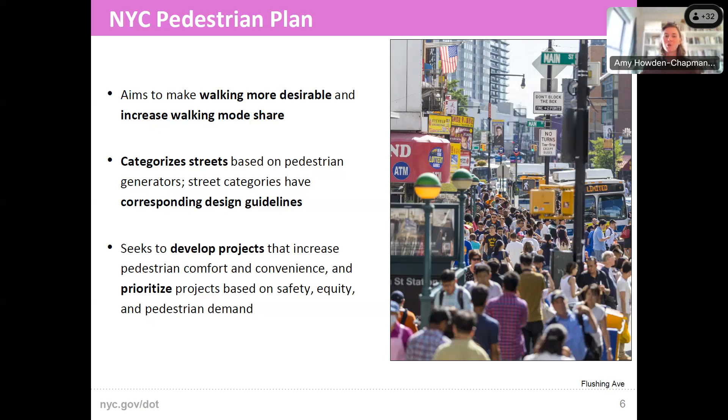We know there's a lot of work to do to improve New York City's pedestrian infrastructure, but we can't do all of that work tomorrow. So where do we start? What is the walking mode share currently in New York City? Where are we at now? And what are some of the barriers to walking that prevent walking from being comfortable and convenient?

Obviously, walking experiences vary greatly across New York City. It's not a monolith, but we see here that in Manhattan, 80 to 90% of commuting is done by walking, and in many parts of Brooklyn and the Bronx that's also really high, 70 to 80%. However, I'm always struck by how even in parts of the city where we know folks are more dependent on vehicles because of land use typology or less access to mass transit, there's still a relatively high number of walking trips.

We see here that in outer Queens, around a quarter of trips are still walking trips, but as we get to middle Queens, it very quickly jumps up to over a third of trips being primarily walking trips.

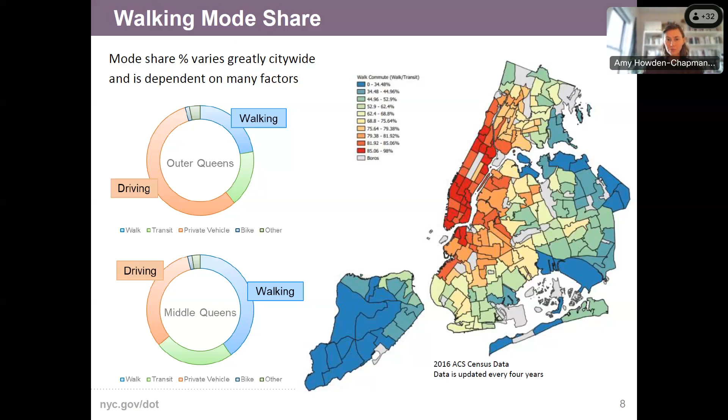Because of that variation across the city, the pedestrian mobility plan doesn't try to have one-size-fits-all solutions, but rather looks at different needs—different walking goals for different neighborhoods based on walking rates, geographic factors, and socio-demographic variables.

So for Manhattan and Brooklyn, our aim is to reduce pedestrian congestion and really ensure that right-of-way allocation reflects the modal split of users.

Moving a bit further out, to mid-Brooklyn, Queens, and chunks of the Bronx, the goal is to increase the number of pedestrian trips taken in New York City, really getting walking up in furtherance of citywide health and emission reduction goals.

And then moving to the outer boroughs, our aim is to ensure pedestrian infrastructure is safe, is comfortable, and really reflects the needs of the users who are walking in those places.

Finally, there are parts of New York City that are lacking very basic pedestrian infrastructure—think no sidewalks at all, or maybe sidewalks on just one side of the street. So in Staten Island and other parts of the outer boroughs, our goals are more centered on the development of a fully built-out pedestrian network.

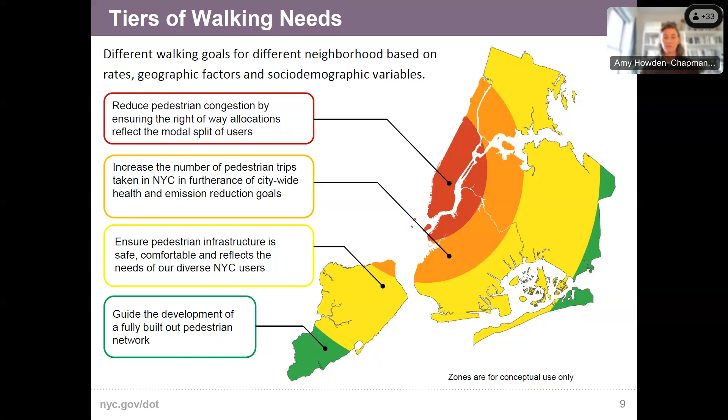I'm sure some of you are familiar with some of these struggles around New York City. To illustrate some of the barriers to walking that New Yorkers face, we have missing sidewalks, or sidewalks without adequate width, or sometimes with internal obstructions that restrict movement—trash cans, trees, this kind of thing. We also have sidewalks with insufficient width just because of the density or volume of users. Think of any busy sidewalk you walk down where you're tempted to step onto the street and walk for a few steps because you can't get past all the folks there.

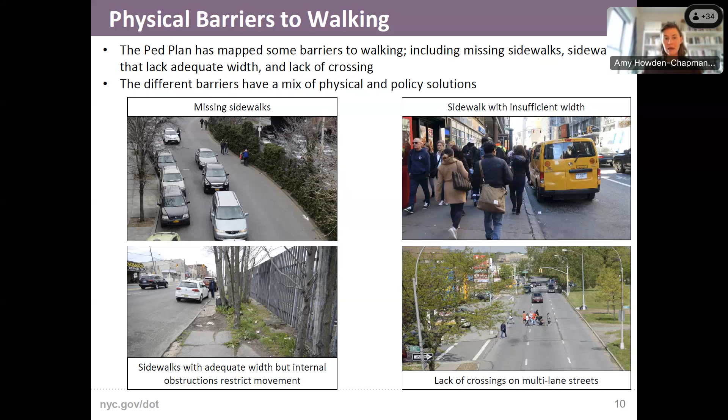We also see lack of crossings as a barrier to walking. Being able to walk comfortably and conveniently down the sidewalk is one thing, but being able to cross the street safely and conveniently is also a really key part of pedestrian infrastructure.

So these are some of the barriers, and then we have a different mix of physical and policy solutions. It can be as simple, although as expensive, as putting in a new sidewalk. We also have the ability to expand sidewalks, which we can do in either paint or concrete.

This image here is of 8th Avenue—this is what we call a super sidewalk. We can reconstruct sidewalks and remove obstructions, and we can add crossings, controlled crossings, and crosswalk markings.

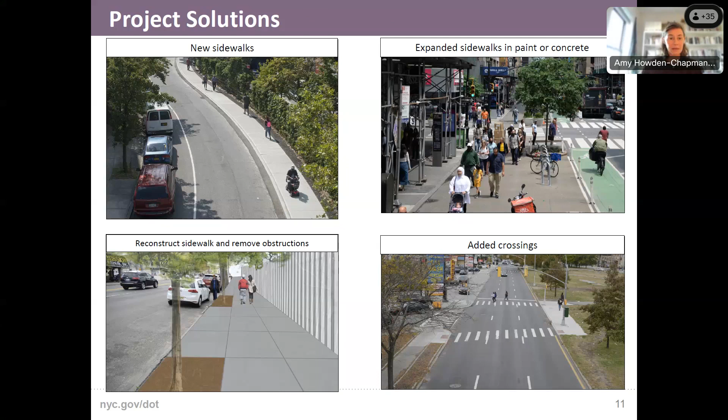We've been talking a lot about how New York City's streets are all so different. One of the questions we started asking ourselves when creating this plan was how can we use data to show where there are a high or low number of pedestrians throughout the city? While we could collect pedestrian volume throughout the city, that would be very expensive, and we'd have to do it yearly for the data set to not be static, because New York City is constantly changing, with development happening in different areas. So we want to create a data set that reflects that time.

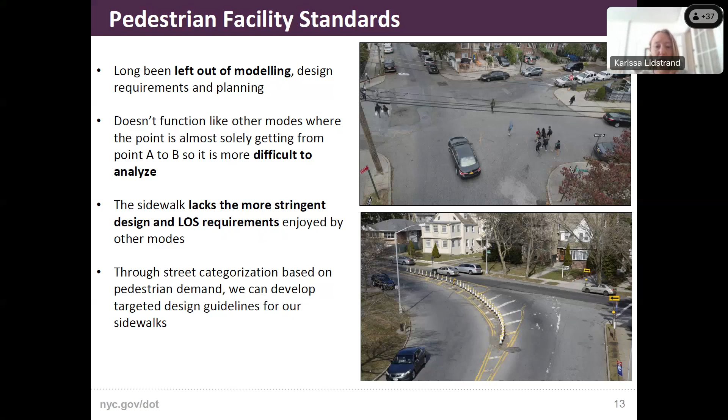Before beginning that process, we wanted to step back and ask ourselves, what is the use of the sidewalk? We work for the New York City Department of Transportation, so we typically think of walking as a mode of transportation, but sidewalks are more than just that. They're also meeting places, they're commerce, they're areas where you could people watch. They play a lot of different uses. While we recognize that, we do want to focus on walking and making that both comfortable and convenient for people throughout the city.

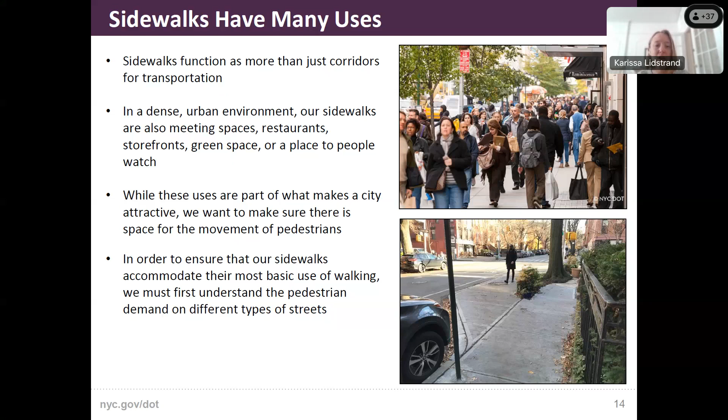That's what we started with when developing our plan. We categorized New York City streets into 5 different categories, with baseline being the lower category and global being the higher. Baseline streets are where you see a lot of lower density residential in the outer boroughs, mostly single family homes, not a lot of pedestrian generators in this area. We were also thinking about comfort and convenience, what it feels like to walk on these types of sidewalks. Baseline might be where you're walking by yourself, but you're still able to comfortably pass by someone coming the other direction.

Moving up to community connector, this is where you start to see a little bit higher density of residential. You might also see a small park or a lower enrollment school, but this is where if you're walking with a friend and you pass by someone, you still feel comfortable on that sidewalk. Moving up to a neighborhood corridor, you start to see a lot more commercial uses, and the parks might get larger and school enrollment might get higher. This is where you might see small groups of people wanting to pass by each other, but still wanting to feel comfortable walking in that space.

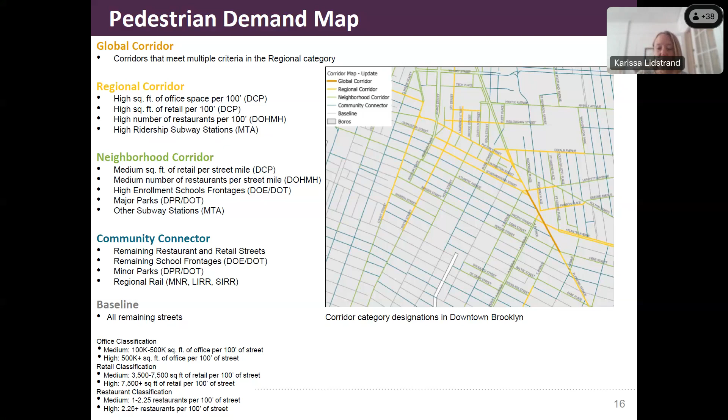You can also see on Flatbush Avenue there's a few blocks of a global corridor, centered around the Barclays Center, which is a very large destination. Also a lot of housing clustered around that area. These are just some examples of the data.

And then to look citywide and see the breakdown, really most of the city is baseline or community connectors. About 15% of the city is neighborhood, regional, and global. And some of the global, as I mentioned before, are in Midtown, but they're also in places in the outer boroughs. Might be a little hard to see here, but 125th Street in Manhattan is also a global corridor.

We have Main Street in Flushing, also global. And then as I mentioned before, we have Flatbush Ave in downtown Brooklyn, which is also global. So there's a good mix of street categories in each of the boroughs.

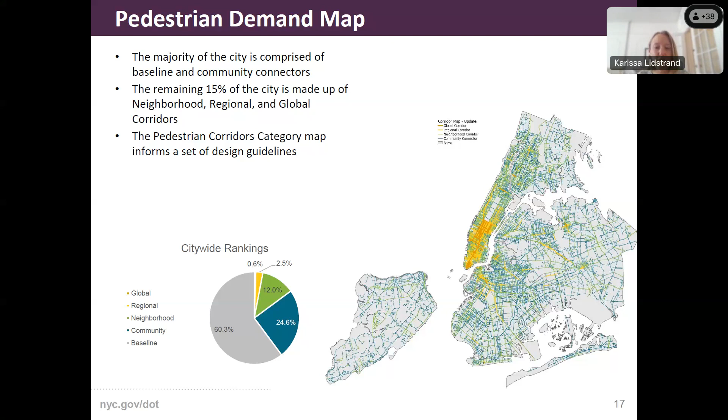So this demand map really is the starting point for other data sets and design guidelines that we've been wanting to look at. And so I'm going to turn it back over to Amy to talk through how the demand map now informs the design guidelines.

Thanks, Karissa. Yes, so onto the anatomy of a sidewalk. So thinking through just the next slide.

So thinking through the anatomy of a sidewalk, this is part of our plan, and it's a way for us to designate three, at times overlapping, categories. So here we have the furnishing zone, the walk lane, and the clear path. And I want to emphasize again here that through these conceptual categories, we're looking to go above and beyond the basic affordances of ADA, above and beyond just those very narrow passing things that ADA requires.

So, okay, the furnishing zone. This is the section of the sidewalk between the curb and the walk lane that does not primarily accommodate pedestrian movement, in which amenities can be placed. So we see here a tree pit, there are many other things we know.

Then we have the walk lane. That's the portion of the sidewalk that accommodates pedestrian movement, and the walk lane includes the clear path, and it can also include appropriately spaced amenities, which allow for pedestrians to flow between them.

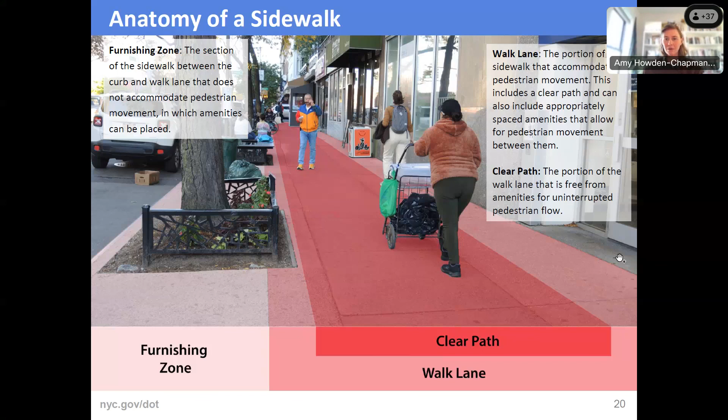All right, and we take this anatomy of the sidewalk and we pair it together with the corridor categories, and then we get sidewalk guidelines. These are not regulatory, but they are kind of ideals that are helping us plan.

The recommended width of the sidewalk varies by corridor category based on functional use. So from a baseline street where the clear path is relatively narrow, around 4 feet, as Karissa talked about, the functional experience of a baseline street, you may have 2 people walking side by side, but anything else would be a little tight.

And then we go right up to the global corridor where we have a really wide walk lane, 20 feet or more, and also a really wide clear path, 15 feet or more. Again, as Karissa mentioned, the global corridors are really places where we have tens of thousands of people visiting a day.

These guidelines are really trying to accommodate that vast number of pedestrians. It's important to note that the furnishing zones also increase with the corridor categories. We know that the needs of a furnishing zone on a baseline street might be quite different from the needs of a furnishing zone on a global corridor. A global corridor might have a subway entrance or exit, a subway elevator. But we know that all New York City streets have fire hydrants, tree pits, etc., so we always want to keep that in mind with the furnishing zone widths.

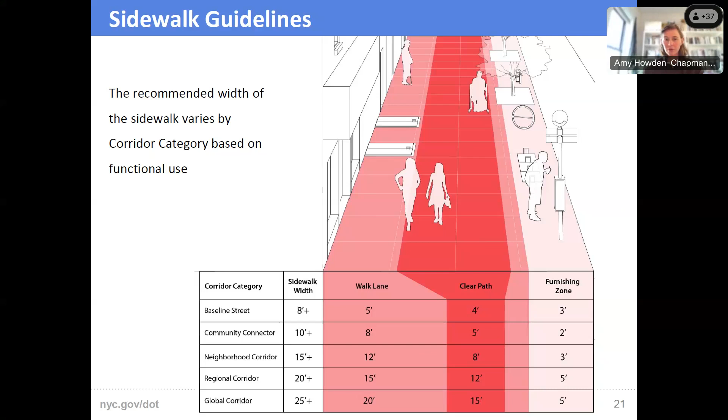Thinking a little bit more through amenity zones. Obviously, we need amenities, and they really affect the comfort and convenience of walking too, whether it be the shade from trees, the ability to sit in a bus shelter on a rainy day waiting for a bus, wayfinding, concession stands. They all add to our experience of the street.

However, amenities, while they can enhance the streetscape and enliven our pedestrian realm, our experience of walking, they do sometimes disrupt that basic pedestrian flow, that pedestrian movement. So getting this balance right is one of the key aims of our plan.

Since walk lanes are where people are moving, amenities can be present in this space, but they should be limited. So it's great to have trees, but we do not want a wall of trees, right? We don't want a wall of planters.

One way I think it's useful to think through the difference between the walk lane, the clear path, and the furnishing zone is to think about a day in New York City where it's just snowed. A clear path has been shoveled out, so we know there's a clear path where we can walk, but there's snow heaped on either side. If we don't have the ability because of that snow to duck in and around other pedestrians, it feels very confining. That's the kind of experience we don't want on an everyday day. That's why we want appropriate spacing of amenities in the walk lane and in the furnishing zone.

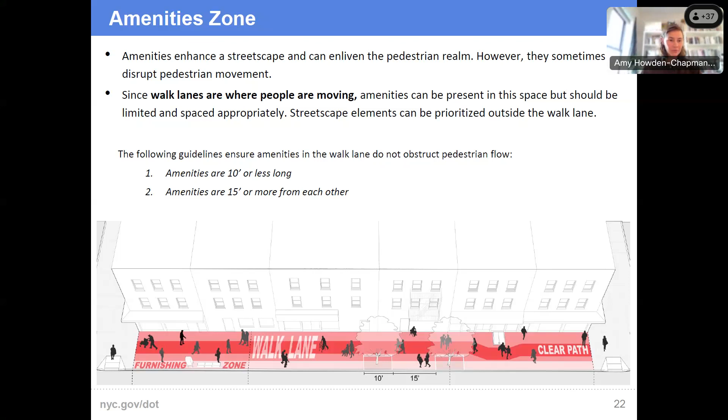All right, and now I'm going to hand it back to Karissa.

Great, thanks, Amy. So while we've been developing the pedestrian demand map as well as the design guidelines, we've also been thinking about what other pedestrian infrastructure data sets we want to help really inform the other goals that the pedestrian mobility plan has.

Really, we want to think about other data sets to inform where the pedestrian unit is doing work, but also to help other units within New York City DOT plan for better pedestrian environments, and also maybe other agencies to help inform their work.

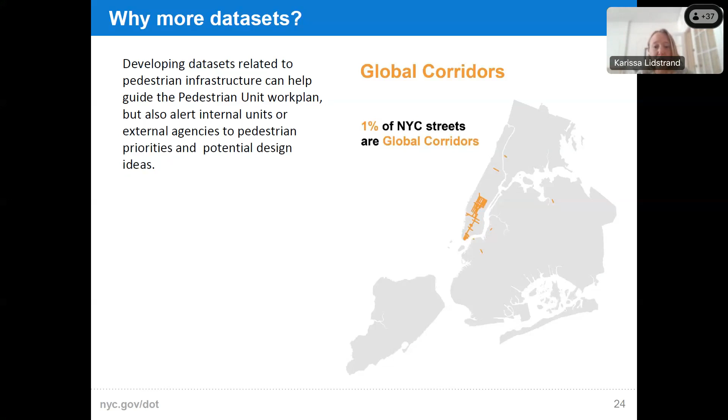So we've been thinking about additional data sets that we want to create or explore with others to really hone in on where we can add better pedestrian facilities. The demand map has actually been really helpful, as well as the design guidelines, in helping us create a few data sets centered around where there might be narrow sidewalks throughout the city.

So this is looking at existing sidewalk widths and whether they meet our pedestrian mobility plan design guidelines or not. And if they are narrow, what kinds of treatments could we do in these areas?

One example is 7th Avenue in Manhattan. The photo below shows the improvement that we made, adding a painted sidewalk extension, which we are calling super sidewalks, to provide more space for pedestrians to flow.

And then on the right you have a snapshot of the data set, and the blue lines are showing the narrow sidewalks along 7th Avenue, and this is where we ended up putting in the super sidewalk. Another data set that we've been thinking about is where we can prioritize curb extensions based on high pedestrian volume.

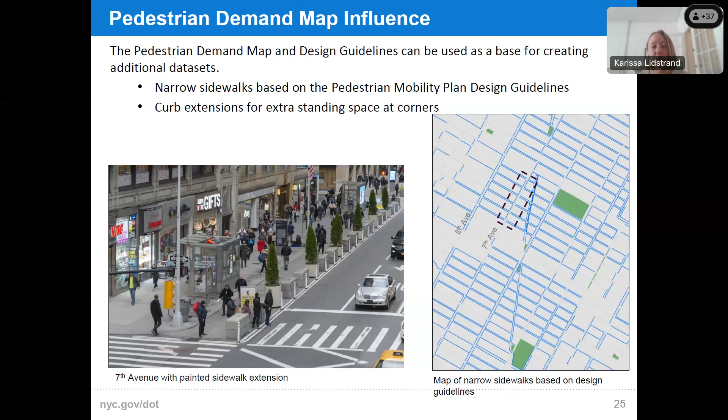So thinking about maybe a neighborhood corridor or higher intersecting with another neighborhood corridor or higher, and seeing if those could be good locations to add curb extensions. Maybe there's an additional sidewalk width deficiency there, or maybe there's been some Vision Zero crashes at that location that might prioritize that curb extension. So those are some of the things we've been thinking about as we've developed the demand map.

In addition, we've also been thinking about other data sets that enhance pedestrian access, like long crosswalk distances, trying to figure out where we could shorten those, where there might be a lack of sidewalks throughout the city. And then another thing that we've been wanting to look at more is complex intersections. This is where we have an intersection where there's at least 5 streets that come together, or intersections that have obtuse or acute angles that we want to prioritize, because these intersections tend to have either missing crosswalks or really long crosswalks.

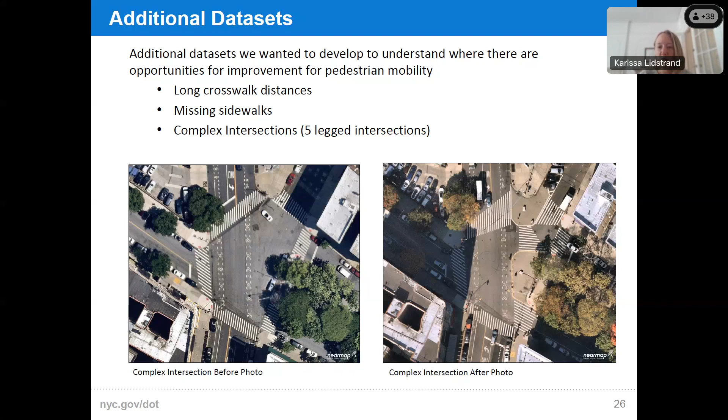So this is an example in Upper Manhattan on St. Nicholas Avenue and 165th Street. We have a before photo on the left of a complex intersection, and an after photo on the right, where we added some painted extensions and added some crossings to facilitate the direct path that pedestrians were flowing along St. Nicholas. So these are just some things that our team has been thinking about in addition to the demand map and the design guidelines, to really help inform where we're working and how we're prioritizing our work in the city. So I'll get into a little bit of that now, how we're thinking about identifying projects.

Taking a little step back, historically our unit has been very request driven, meaning that we've had a lot of 311 type requests or ARTs requests that come through, and that might just be a single person asking for an upgrade at their intersection.

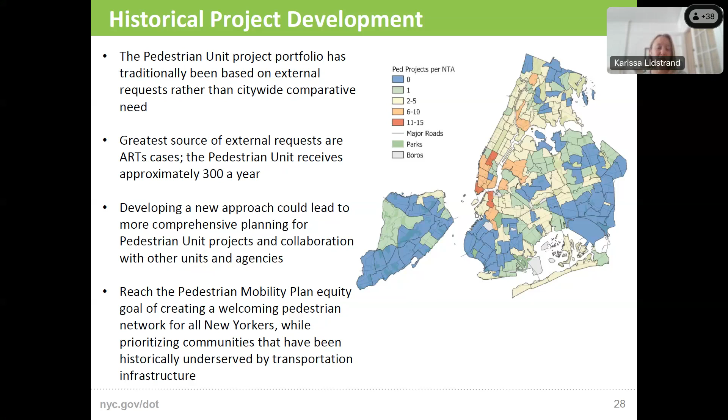So these are a few of the ways that our team is now identifying projects. One of them is called comprehensive neighborhood analysis. This is something we've created recently, and I'll get into a little bit more on the next slide.

But project scope identified by others - this is typically where either an internal unit at DOT or a city agency like the Department of Environmental Protection, DEP, gives us a scope that they have for like a water main project, and then we see if there's any synergies with pedestrian improvements there. So usually a scope is already identified, and we're helping to enhance the work at the same time that someone else is doing work.

And then we also receive requests through the Department of City Planning related to rezoning and thinking about the pedestrian environment from those stages, as well as mayoral initiatives. And then something that we've been doing for a long time is coordinating with the Parks Department on adding new sidewalks or better crossings to park entrances or playgrounds. So thinking about that more strategically is something that we're interested in.

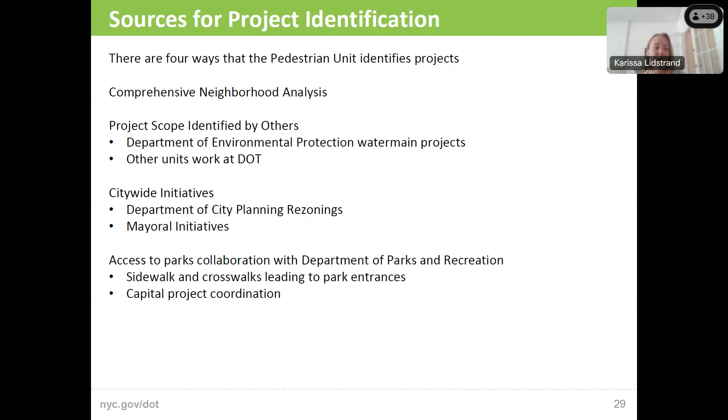Getting a little bit more into the comprehensive neighborhood analysis, something that we've wanted to do is look a little bit more holistically at areas, since we were so request driven, that was really focused on sometimes just one intersection or a small corridor. We really want to take a step back and look holistically at a neighborhood level. So the Department of City Planning has Neighborhood Tabulation Areas, NTAs, which is a similar size to neighborhoods, but it's based on census tract boundaries. You can use a lot of demographic information within NTAs.

So we decided to use that as kind of our geographical boundary, and layer in some of our priorities from the pedestrian mobility plan to really prioritize where we might want to start looking to identify projects. And the way we would identify projects is using all of the data sets that I was just referencing in the infrastructure mapping, as well as the pedestrian demand map. So some of the goals that we have are looking at where there are New York City streets plan equity tiers, Vision Zero areas, thinking about safety throughout the city, and then also looking at a metric that focuses on comfort and convenience.

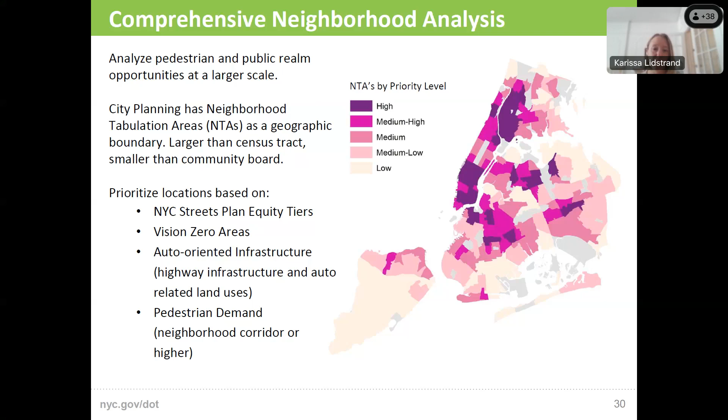34th Avenue is also in an area where there's not a lot of large parks, so some use this as recreation, as well as, whenever you get out of school and want to walk home, as a form of transportation. We're also in this period of the climate crisis, Black Lives Matter movement, and environmental justice concerns, so thinking about how we're prioritizing upgrades to our pedestrian infrastructure is really important right now.